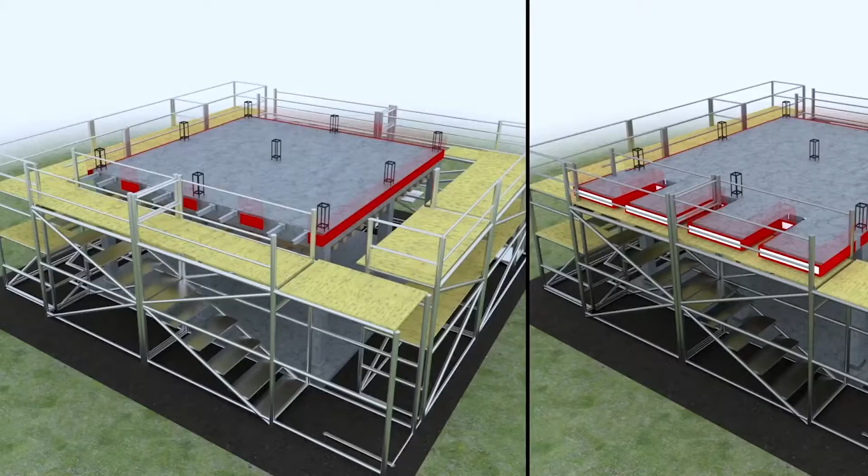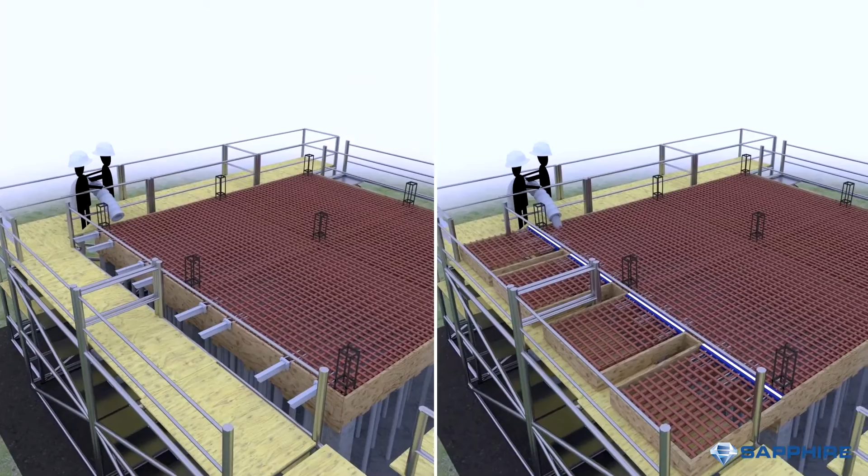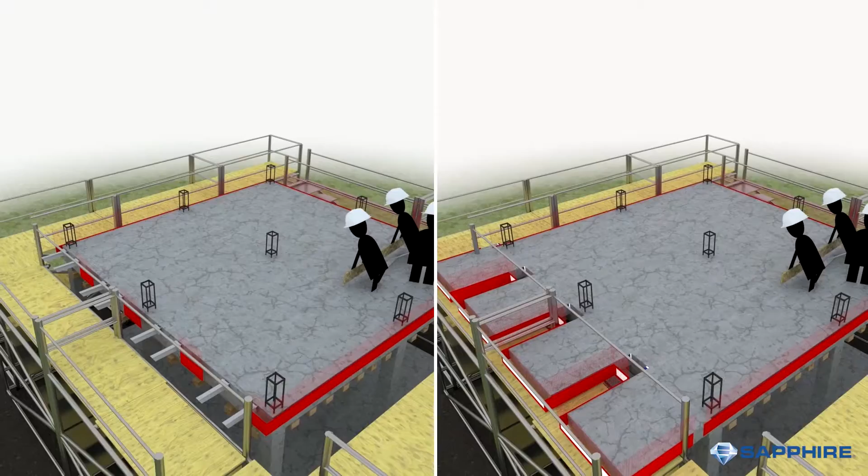Confused which type of balcony you should choose? In this video, we seek to demonstrate this with a visual comparison of Sapphire glide-on balcony installation versus the traditional route of in-situ casting of concrete. We have extensive experience in both these approaches, so here are a few of the points we have learned to be pitfalls with a concrete balcony construction.

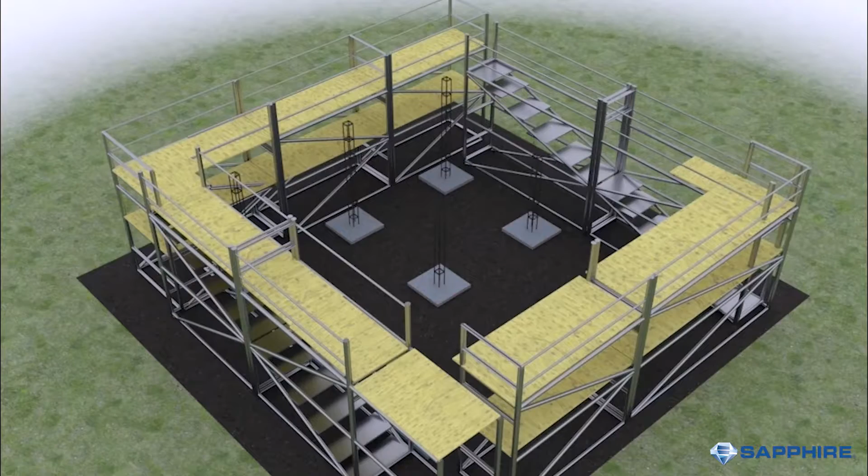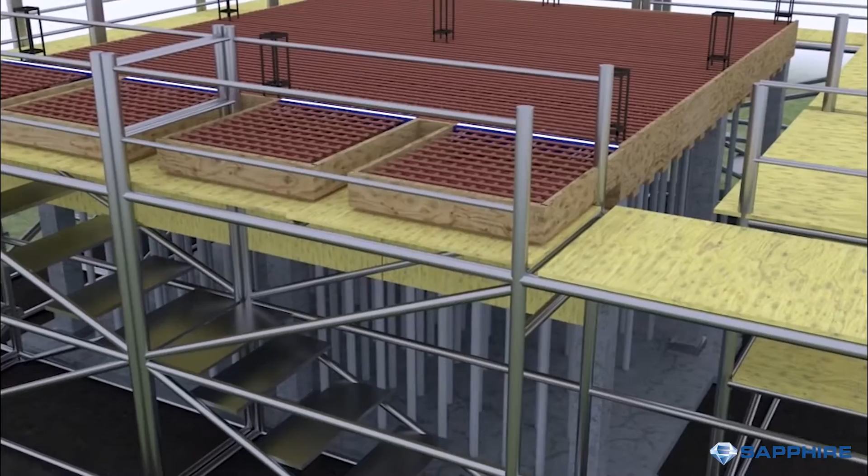Starting from the ground, we have an illustration of both construction methods side by side. Both methods start off dependent on the speed of the concrete pour. However, you can see that with the concrete method it is a lot more complicated, with the need for scaffolding to step in and out to accommodate the concrete balcony structure. This takes longer to set up and usually costs more.

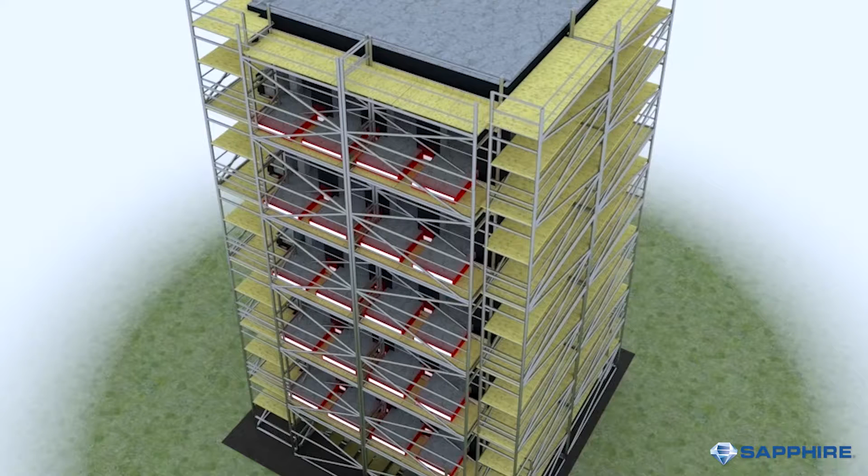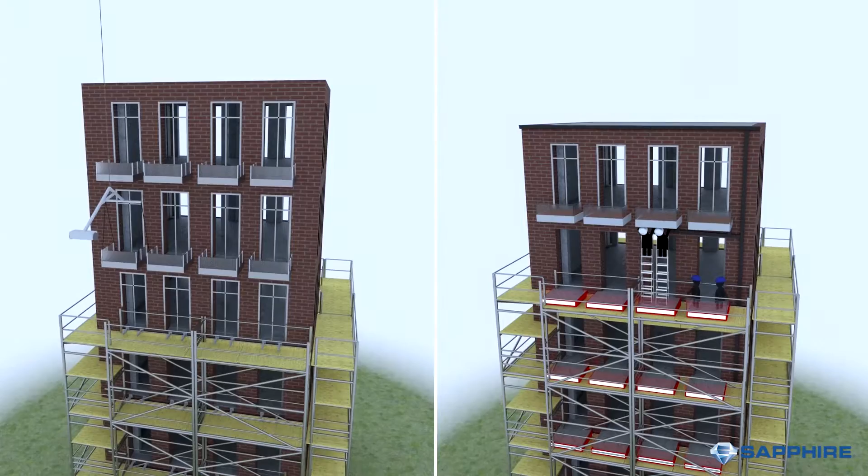Once the building tops out and the facade areas are finished, you can now see how the scaffolding is being struck earlier with the glide-on method, while the concrete method is taking a lot longer as all the balustrade installation is dependent on scaffold access and is slow due to the nature of loading out materials and drilling difficulties with rebar conflicts.

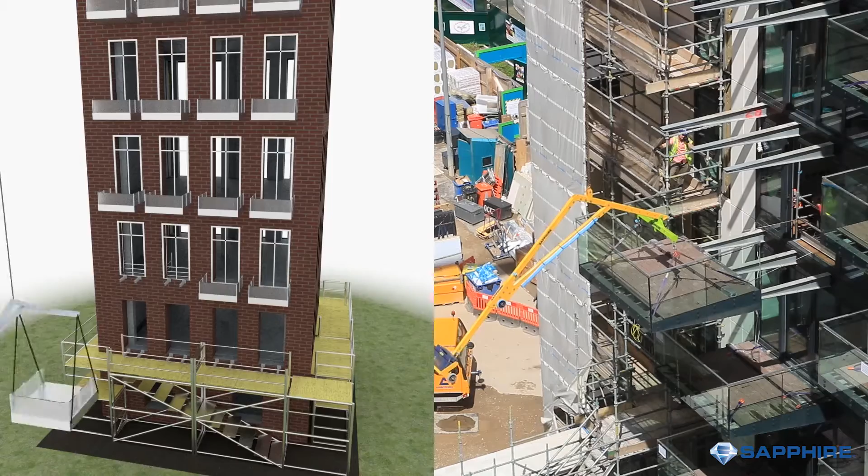Note the number of tradesmen and different trades working on the concrete balcony construction. This increases the time spent due to organizing each team as well as the supervision required. You also have the accountability aspect to consider if things went wrong or the task ran over schedule. This is a stark contrast to Sapphire, where the balcony is fully assembled in off-site production facilities, meaning there are only 3 or 4 installers required. These are highly trained for the job and work as a team.

Another common issue we came across with installing balustrades onto concrete balconies is the high risk of hitting reinforcement bar when installing the balustrades. This again slows the installation down. While both choices require the use of thermal breaks, with a concrete balcony, this means all the edges need to be thermally broken compared to an average of 2 or 3 small areas on a glide-on balcony. That makes a significant difference to heat loss.

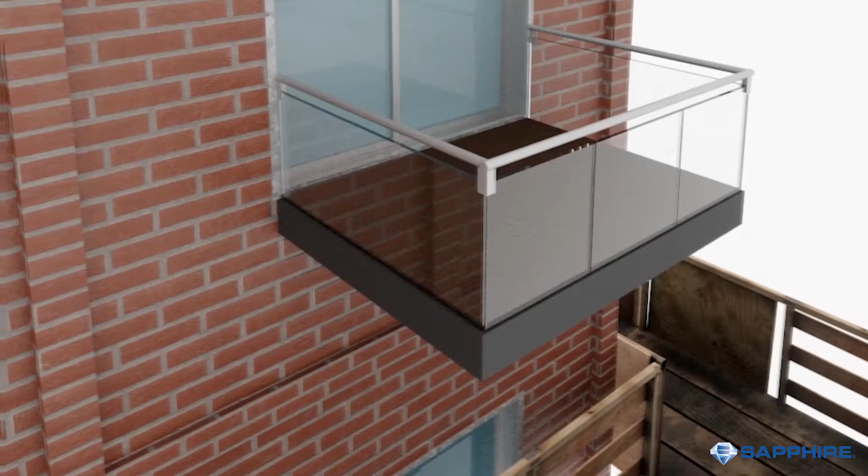Lastly, with a concrete construction, the balcony needs to be waterproofed and drained. Not only is this slow and costly, but it will often significantly increase the thickness of a balcony build-up, making it extremely tricky to use thinner slabs. This is yet another time-consuming process and can cause unnecessary cost increases, for example, rainwater pipes and thicker concrete slabs or floor finishes.

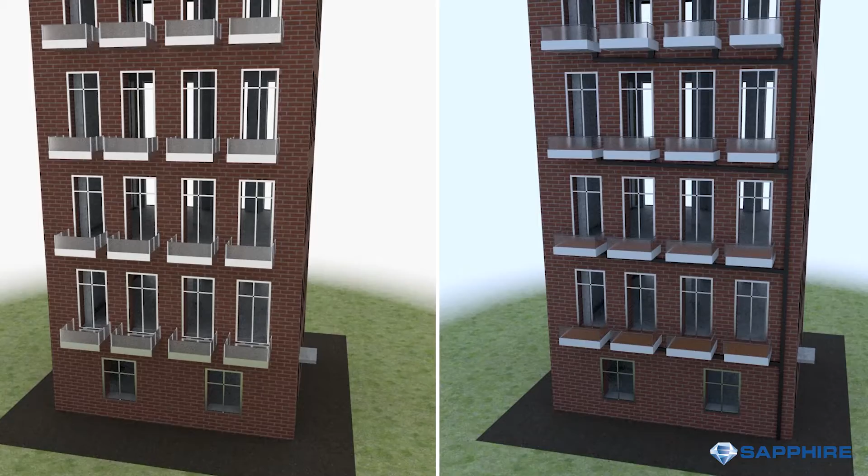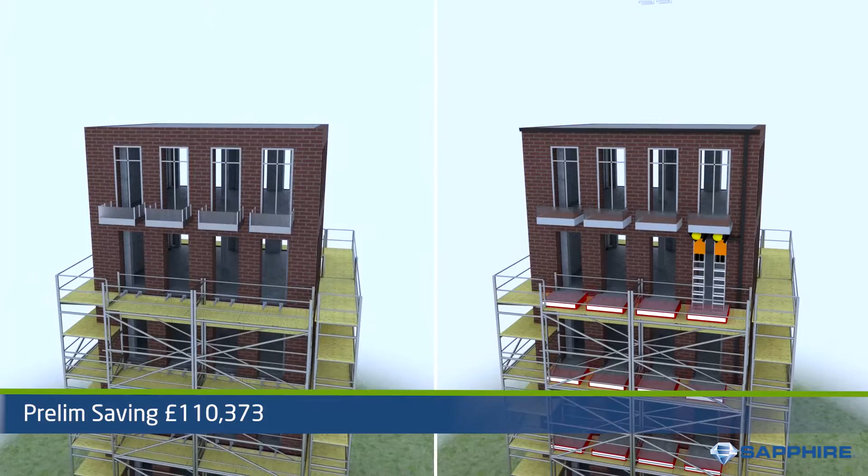Now let's take a project of 200 balconies to compare traditional concrete and glide-on balconies to understand the cost savings which can be made. These include: 1. Additional scaffolding costs for working around the concrete projections of up to £152,250. 2. With glide-on install enabling a conservative 15 balconies a day, concrete balconies would add around £110,373 of prelim costs, including crane hire and scaffold, etc.

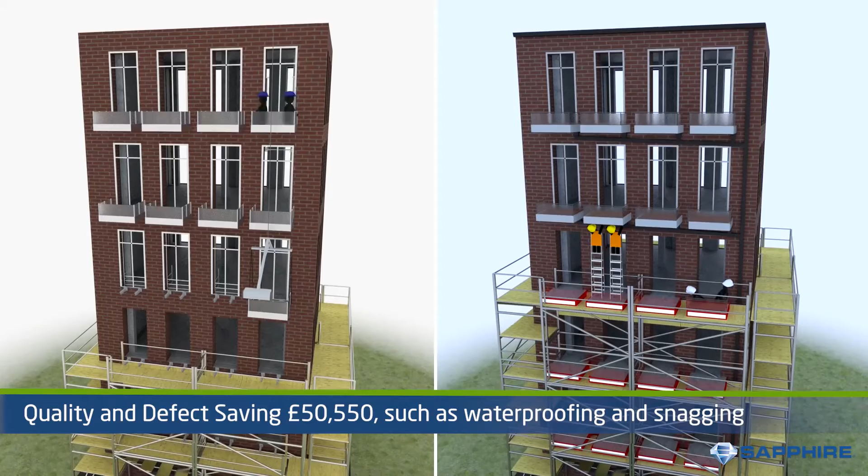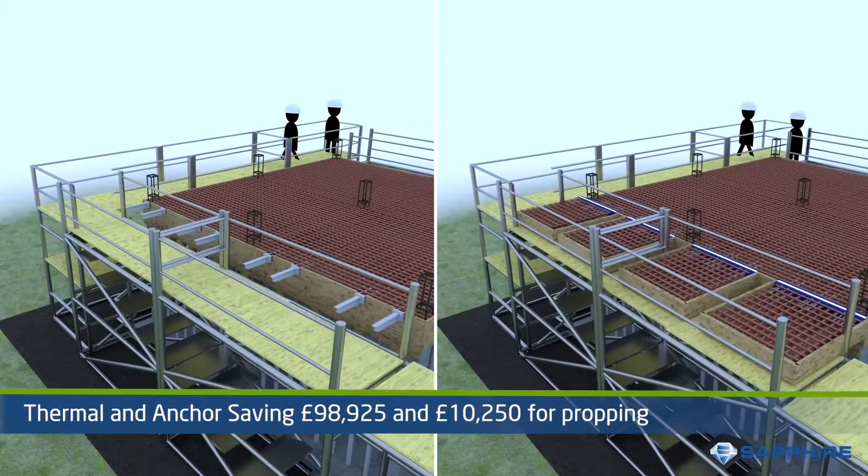3. Concrete balconies have significantly more trades working on them, again meaning this same example could cost an extra £50,550 more than glide-on balconies would. 4. With concrete balconies, thermal and anchor material and labour costs are significantly more, and anchors need to support more weight. Because of these, this same example could cost an extra £98,925, plus an additional concrete pour propping of £10,250.

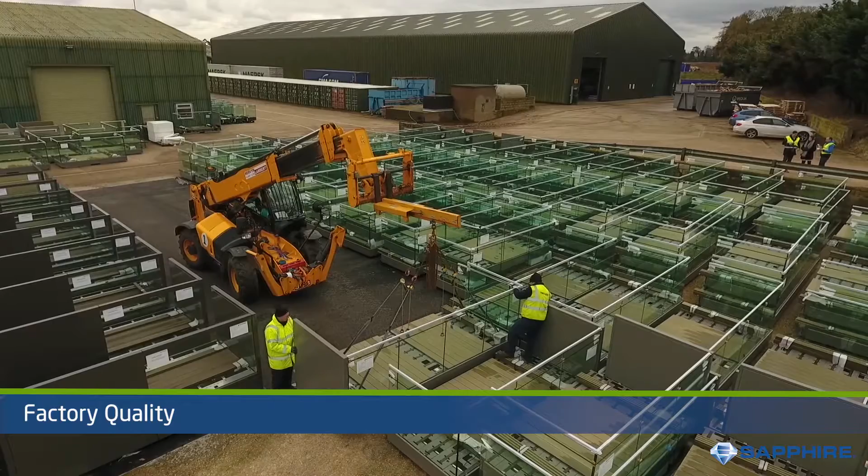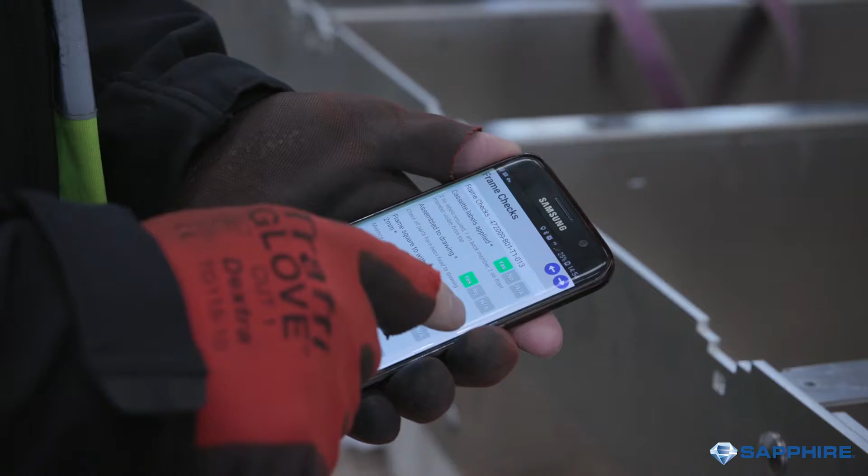In addition to the significant cost savings that glide-on cassette balconies offer, the main benefits of the glide-on method are: 1. Factory quality. The entire balcony is manufactured pre-install using the bespoke Sapphire quality assurance process, resulting in precision engineering, fewer on-site trades and a rapid install. Comparatively, factory finished soffits may only take 15 minutes to fit in the factory, whereas if being clad to the underside of an installed balcony, it may take 2 people rather than 1 and take several hours.

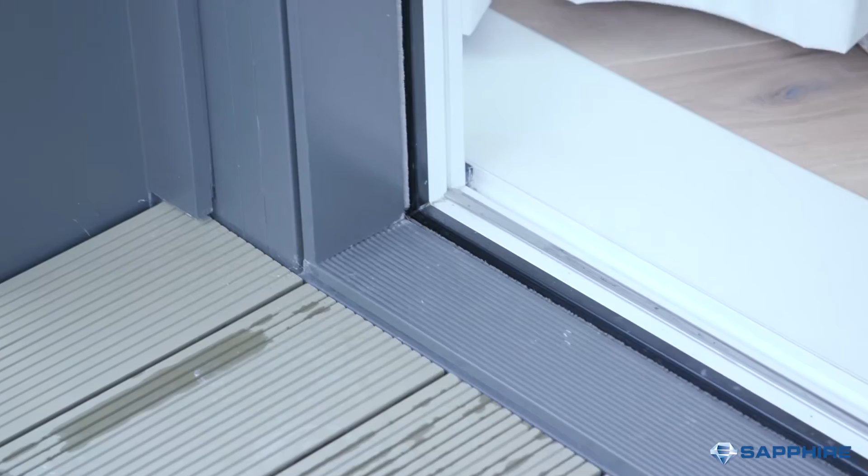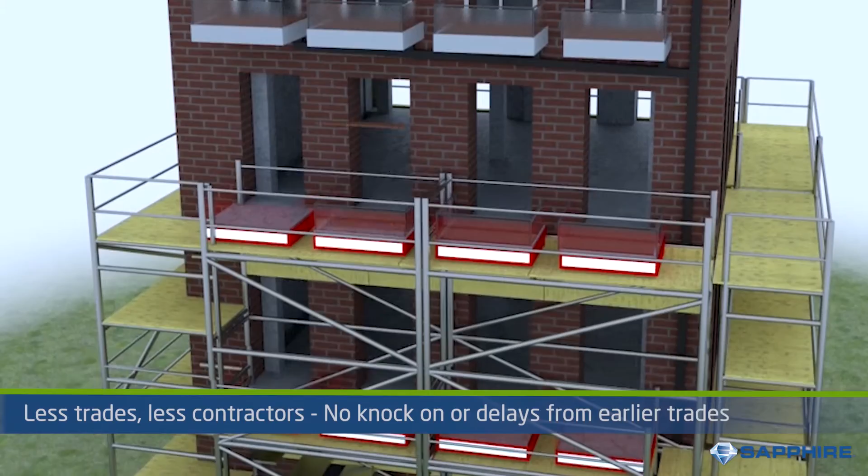2. With a lightweight structure, the ability to drain through thinner slabs and floor finishes can be achieved with glide-on balconies, while still being able to achieve level thresholds and minimum water collections and splashback distances. 3. Simpler drainage and decking means a sleeker, thinner and more efficient to produce balcony. 4. Fewer trades and fewer contractors helps avoid the knock-on costs or delays from earlier trades.